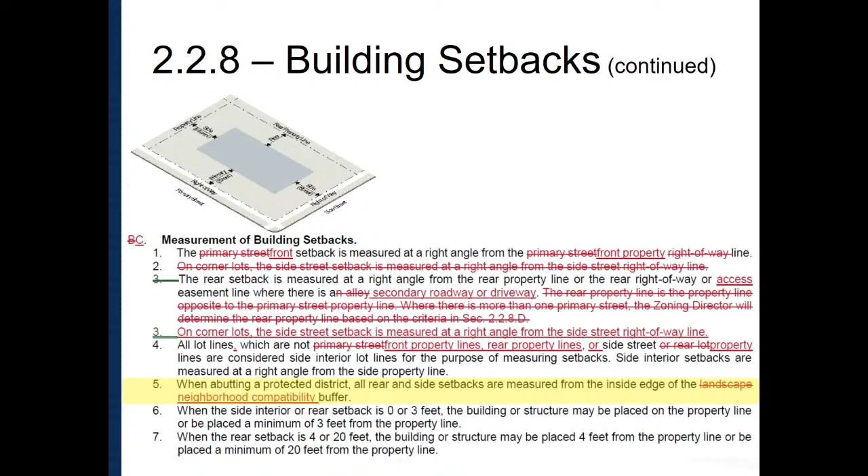Same thing with how to measure the actual setbacks on corner lots, and then if there are lots where all lot lines that are not the front or the rear or a side street are going to be side interior. So we tried to also make that, because the side that has a road as a side frontage would have a different setback than a side interior. This was just an update that we don't refer to it in the code as a landscape buffer anymore. It's a neighborhood compatibility buffer, and just to avoid confusion, we noticed that and went ahead and made that recommendation.

This is just a renumbering of the letters based on the other changes. And then for parking, this is another thing that we were asked to bring forward and look at. This is getting into whether we're referring to townhouses. There's a component regarding rear-loaded townhouses where the garage doors are on the back side of the building, and then those that are front-loaded. And by backside, I mean there's a front door facing a street or some other space, and then the rear of the building is where the garage door is, and front-loaded, the front door and the garage door are on the same side of the building.

And so again, updating the definitions, one of the things that we found to be very confusing is we referred to alley, and when the document was put together originally, alley just referred to anything that was in the back of the building, but we have a typical section called an alley, and we wanted to make sure that we avoided any confusion between those, so we referred to it as an access right-of-way or access easement as opposed to an alley, just to not confuse it with the definition when it comes to the typical section, because it's not the same. And then this is where the distance regarding the garage door, and the distance from the property line or that easement line to that garage door face were discussed. This is something that council did ask us to come back to. I'm going to get to that in just a moment.

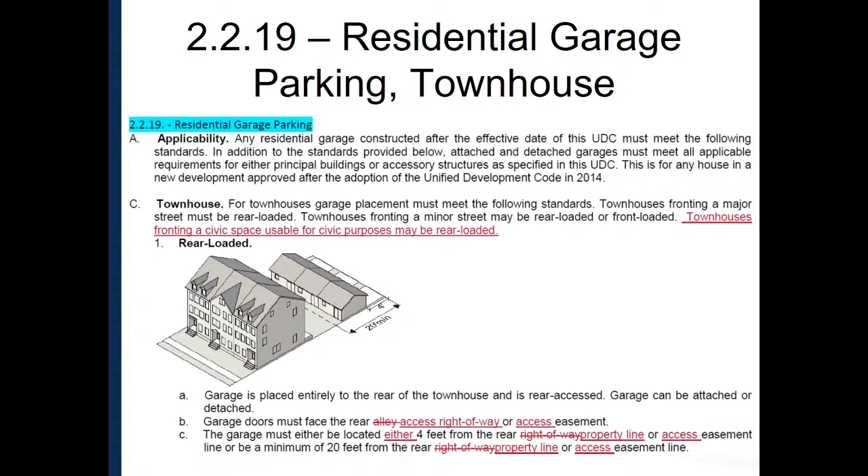The very next section is the front loaded, so the same thing, looking at the dimensions of the garage door from that front property line. There is the administrative alternative finding, which we spent a lot of time talking about. One of the things that we wanted to make sure is very clear is this is only specific to the garage door width. It's not to anything else. So this was a place where we wanted to make that very clear.

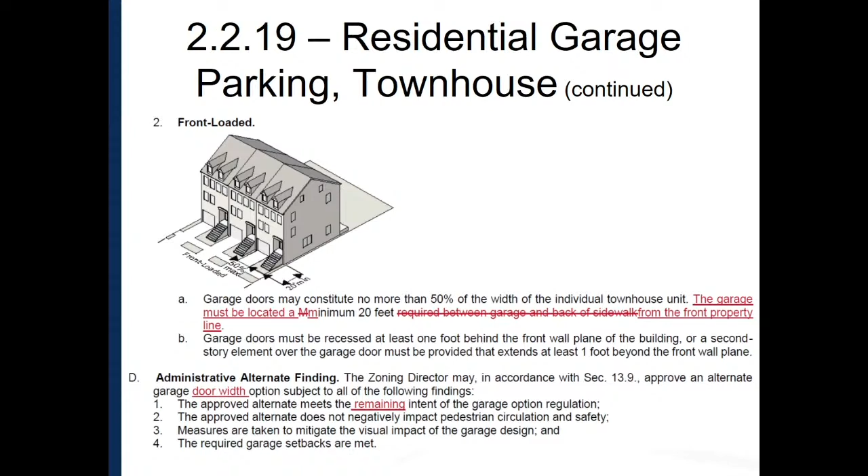And then the residential parking location, so this is the parking in the front setback. One of the things that is not a problem just for townhouses, but it is for pretty much any single family house, is that if you do have a garage, it's in the front of the house, or even honestly one that goes around to the side of the house. If you have a narrow lot, the combined parking and driveway constituting less than 40% between the front of the building and the property line can actually be problematic, because if you have a narrow lot and a front garage, that garage may be half of the width of your lot, and that certainly is the case in a townhome, regardless of the width of your driveway, because we have units as small as 20 feet, and you have to have a driveway a minimum of 12 feet wide. So you automatically create a conflict with the code.

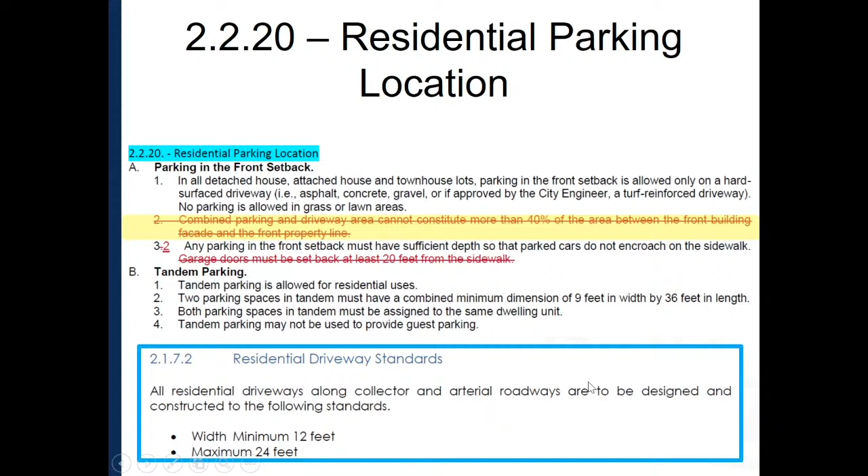So our recommendation is to eliminate the section in the code that refers to that, because we have driveway standards that you've adopted in the construction specifications that give the driveway widths, and that is that you have to have a 12-foot minimum width for a single driveway, and then the maximum would be allowed for 24. So this would be going up to a double garage door, for example. And then removing the garage door setback 20 feet from this line item, because we're covering that in other sections of the code. This is just a reminder that you have to have enough front setback that a car parked in the driveway doesn't encroach into the sidewalk.

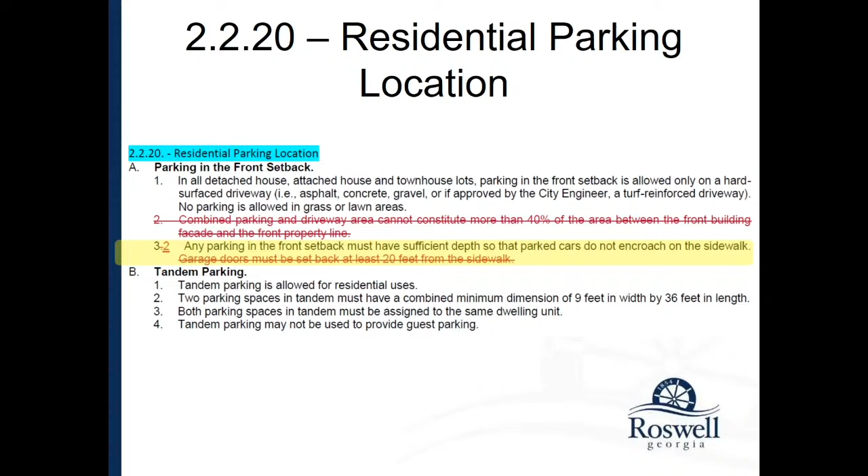I'm sorry, you know what, let me get out of here. Something's happened to this PowerPoint. It's missing a lot of pages, like all the tables that I was just referring to. So bear with me. Well, and I have the PDF of the whole thing. My apologies, that's the presentation I gave you in June. All right, so here we go.

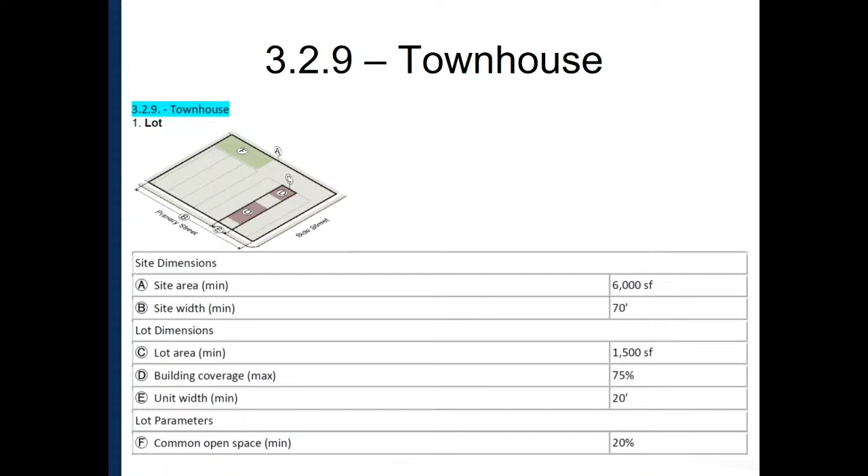And we may need to go back to some of those areas. All of the definitions that we have presented to you so far in the articles, 3.2.9, 4.35, 5.37, 6.32, as well as any of the single family, now that we've made a decision about the 20-foot garage minimum, we would check to make sure we don't have any building setbacks that need to be carried through. That is not tracked in this, since that's feedback we're getting. There would not be any changes. This is in the article when you go into the specific zoning category and look at the setback requirements. It's going to give you your lot sizes, your lot width, setbacks, et cetera. So there would be no changes on this first section where the definition of lot is. This all would line up with the terms used in the definitions we've talked about so far.

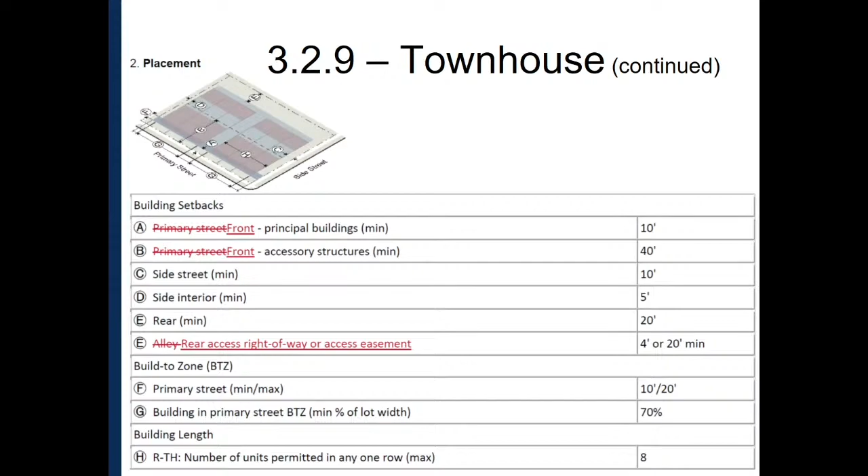And then under placement, we would want to make sure whatever terms are used here are the ones we've agreed to in the other section. So for example, if front is the chosen term instead of primary street, we want to make sure that's carried through. This is something where we would have to make an adjustment. The 10-foot for A, primary for front, if this were a front-loaded townhome, 10-foot won't work. It needs to be 20 feet to have that minimum. So the 10 would be your minimum, but if it's a front-loaded townhome, 20 feet is going to be the setback based on that garage definition, where we're defining the 20-foot from the property line.

And then right now, this says for rear is 4 or 20. So again, that 4 would go away. It would just be 20 that would be there. So those are adjustments that we would need to carry through on all of these. Does that make sense so far? Okay.

And then there would be no change in the scale. And then this is where there was a definition expansion for the pedestrian access. If you're allowed to have front facing either street or a civic space, you'd want to make sure that the front door can also face either of those. And then those same things that we just reviewed on those past 4 slides are carried through all the other sections, which I wasn't going to take the time to go through, unless there's any questions about those. And then we can go to the other questions that were raised to us.

Which is this one. Yes, go ahead. I just wanted to get back to a terminology question. Sure. And the term is civic space. Okay. Can we go back and revisit that? Because civic really means city or town or administration. And I'm afraid that it's going to be confused with our civic zoning.

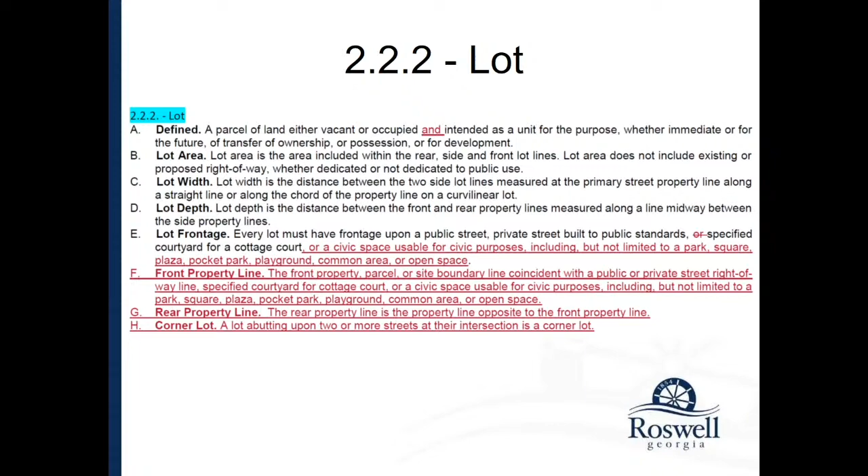We could, if that's what we want to do, to make sure that it's limited to that, because of course, we've got including but not limited to. This was the recommendation that we brought forward based on what staff was asked to find, for flexibility of what that definition could be. And let me see if I have it in here to tell you where we found that from. I don't know if I have a hard copy. We pulled that from another code that allows their townhomes to face a green space. I believe it was Alpharetta, but it might have been Sandy Springs. I apologize, I don't have it. It's been a couple months since I looked at it.

Can I? Go ahead. So just back, I'm really kind of stuck on this one. Why do we add cottage court in this language if this is the townhouse? This is not for townhouse, this is for a definition of lot. So Article 2 is definitions that carry through the entire code. And so in this particular case, every lot, whether it's a townhouse, a single-family house, or whatever, if it's a single lot, this would be how we're defining it.

The problem with the cottage court is that the way that it's defined is it's going to be a space of land with a shared driveway. Some of the lots may front a street itself because there's a street frontage on the property as a whole. So we'll call that the site. So there's the site that is being turned into a cottage court. There's an access driveway, and the graphic that is shown in the UDC has that driveway essentially down the middle of the property with the cottage courts in kind of a horseshoe around that. So you have two that are facing the street, and then the other 3 or 4 units are actually facing this shared driveway, which is why it's called a cottage court.

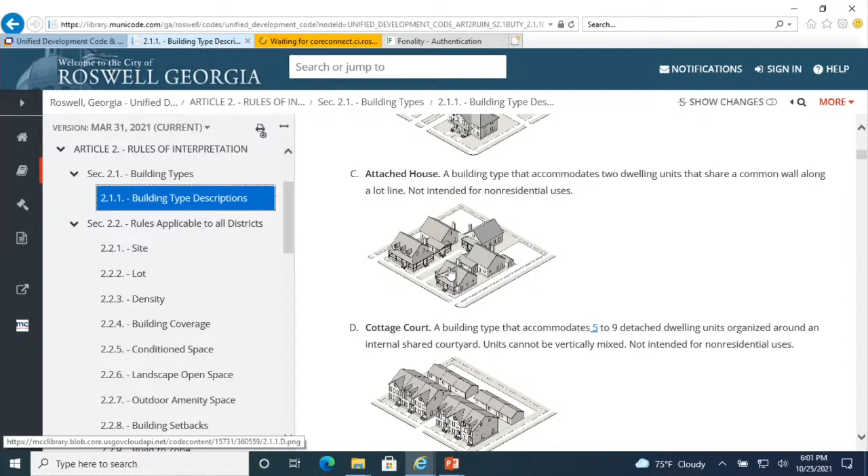We did not make any adjustments to that, but wanted to add, due to the request by at least one person, to look for flexibility of having a townhouse be able to face something other than a street. Because by definition, for lot, it had to have frontage. The front property line, by definition, is coincident with the right-of-way, the roadway. And so thereby, it does not allow for a townhouse to face anything other than a street in the code today.

I guess I thought that we were permitted to build townhouses that faced a green space. No, that's why we're here. So we are not. Nope. So there was a change made in the code a number of years ago to lot frontage, which is letter E on the screen. That was changed to say every lot must have frontage upon a public street, private street built to public standards, or specified courtyard for cottage court. There used to be a statement at the end of that definition that said a rear-loaded townhome could count an alley as its frontage. Okay. That was added supposedly in order to allow a townhome to face a green space.

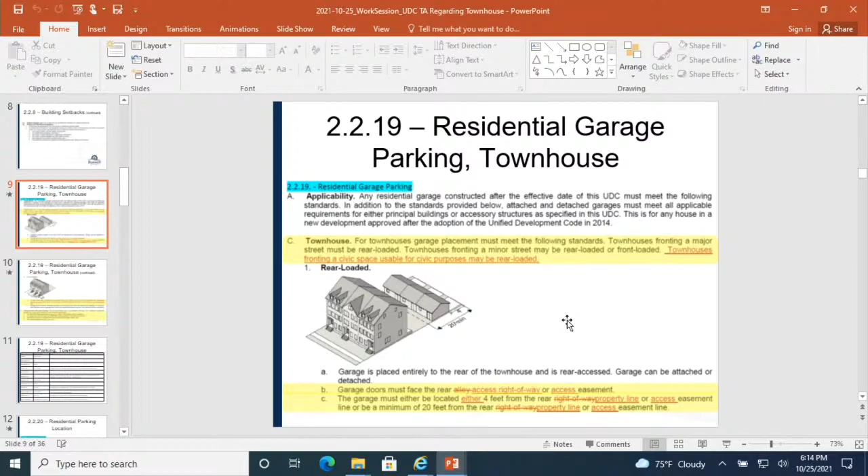It's not something that I think we want in definitions, and I maybe would defer to Davidson just to say, the title of Article 2 is define terms that are used throughout the document. They're applicable throughout the document. So I don't know if it's appropriate to have an intent statement when we're providing definitions. So that's more of a legal term.

So the intent would go basically towards if somebody was suing us, our defense would be, well, it says the intent is right here. It wouldn't be with the definition like Lenore said, because the definition is basically what they're enforcing. So if somebody's coming in for a rezoning, you want to know the intent of that zoning category, then the council could say, no, that doesn't fall under the intent. That's just one of the reasons that we would use as defense when somebody sued for not getting a rezoning. So it wouldn't be appropriate in a definition portion of it.

But it might be appropriate, maybe I just have the wrong section for it, because it's part of Code Studio and it's in a lot of other areas. Right, it'd be good to put in places just to show your intent for what you're looking for, and it helps when they're interpreting something in the code. Well, here's council's intent, this is how we're interpreting it. Yeah, I think it would be helpful, because I've been doing on-the-job training here on this stuff, and an intent statement would have been great. All right. Okay, thank you. Additional comments from council?

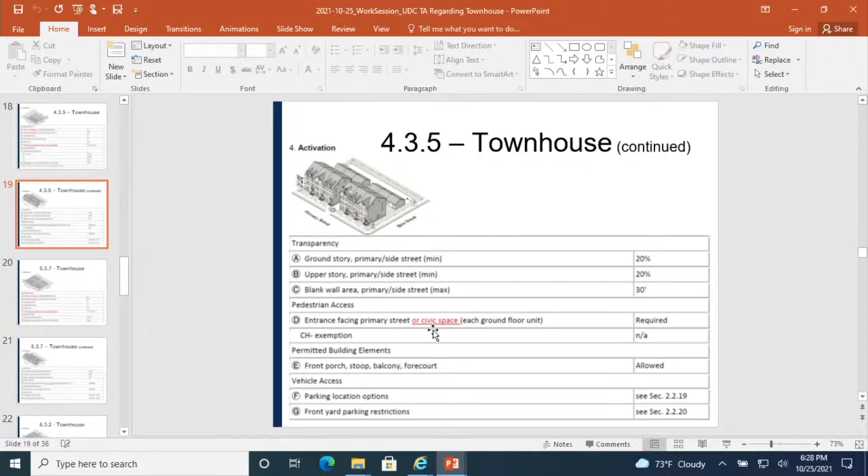If you just left it as entrance facing primary street, then they would have to have a garage door and a pedestrian door on that unit. And so the minimum width that we have for a unit would not accommodate a two-car garage and a pedestrian door. For a point of reference, a narrow unit would have a smaller garage door to be able to provide both of those and go with the minimum, because we require a minimum of a 20-foot unit.

Okay, so that's their choice, you know? Yep, and that is something we can take out. That gets rid of that confusion, and then they can certainly add a pedestrian access to the other side. Okay, thank you. Additional comments from council? Do you have the guidance that you need?

I'm not sure. Let me run through really quickly a number of quick things just to make sure, because I'm hearing not to mess with a lot of the definitions, but that's the whole reason we started this, was the confusion of the definitions and putting them in the same location. So I'd like to first start with, is there any opposition to relocating the definitions from Article 14 into 2 to put them all together in a sequential order? Most of them are the exact same wording, and then we'd also talk about the modifications to those. Is that something that this body is comfortable with us moving forward with? Yes.

In the packet, under defined terms, you're removing some defined terms. I would think that we would want to leave those defined terms and add to those defined terms in section 14.2. So our recommendation is not to have them in both locations in case you change anything, which is what's actually caused some problems. Because we have Article 2, which the title of it is rules applicable to all districts, and this is where we have all these definitions that are applicable to all districts. Right now, some of those are in Article 2, and some of them are in the defined definitions.